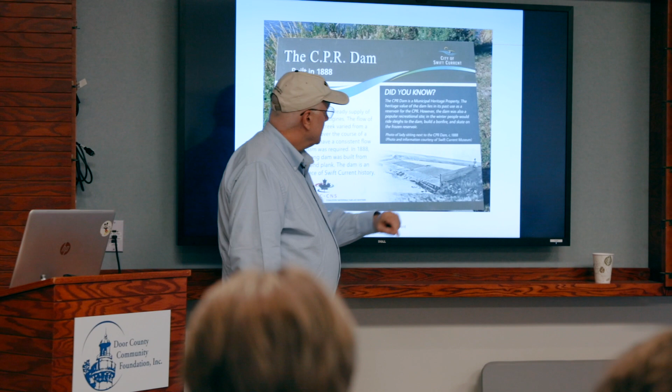I'd use this, but it doesn't work on this. But you can see her here. And this spillway was built in 1888. You ready for that one now? That's 1888. The Alaskan yellow cedar used here in the spillway is still there today.

The planks that are there today were installed in 1888. And it resonated with the city when I said, let's save them, because everybody else said, let's bulldoze them out. And so my idea is to fix them.

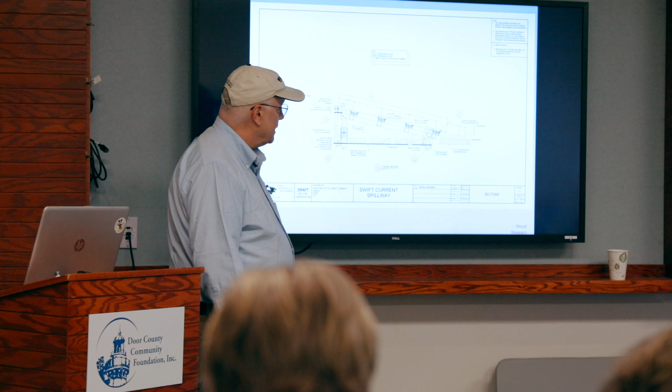And here they are here. You're going to use that same approach, and they're covered in water all the time. But the reason they didn't decay is because what? They're waterlogged, and there wasn't enough oxygen, so they didn't decay. That keeps them going. Look down in here where it would decay because there's enough oxygen, moisture, and temperature. We're just going to go in there and fix it. This is a design solution we have right here, restoring it with all in-kind materials and putting it back into service. The council is really excited about it because it's a heritage restoration, which resonates with the community.

This is an interesting one. You guys are boat builders around here. I don't know if you ever knew that in Canada we have this boat called the Blue Nose. If you've ever been across the border and got one of our dimes, it has a sailing ship on it, called the Blue Nose. This is the building it was built in, and we've got to restore it right now. We're in the middle of restoring it. It's amazing, don't you love it?

I mean, come on, really, look at these old arches. Look at them, it's amazing what they did back then. The funky part of it is depending on what boat went through last, even the tension collar ties in some of them are missing. Like, how is that building standing up? They're gone. So it's an exciting thing for me to look at restoring this building and bringing it back to service.

This is a head wall for a gold mine built by Herbert Hoover back at the turn of the century in Western Australia. He went over there and took an assignment and built this head wall in a gold mine with Douglas fir out of Oregon. And they want to restore that piece by piece. See, there are great stories of restoration out there today.

This is a cotton mill at Old Miss, 20,000 square feet of floor. We actually were able to help them understand where the timbers had come from, not only what kind they were, but where they were cut down, so that they could create a kiosk with a life tree so they knew where the timbers had actually come from.

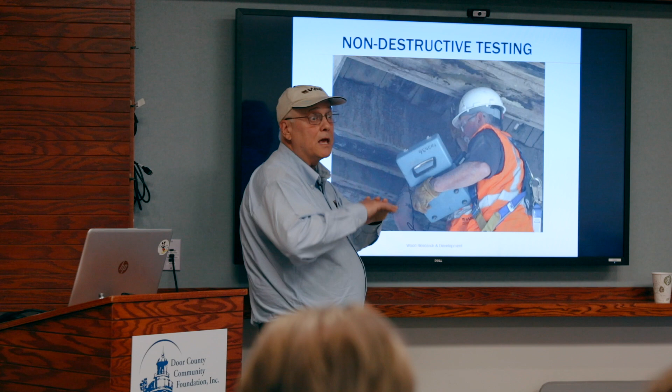But anyway, that's what we do, we developed it back then, and it helps us determine lousy wood. So what Joe's doing here, this guy was one of the technicians that inspected your tower. He's in Montezuma, Georgia, underneath an active railway line, using this stress wave timer to measure the spike damage down through the girder so he knows how to fix them instead of taking them out, because they have a train every 48 minutes. They're not going to take those out, can't get them out in time. So they want to know how to fix them in situ and keep the trains going. That's why these technologies are so important today for us in our economy, to keep things going.

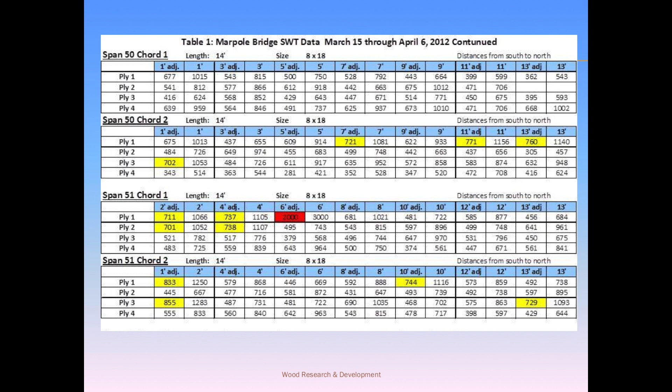The yellow ones and red ones are bad points in the piece. So why would I go in here and ditch them all because I drilled a hole in one place with a Makita power drill and found a little decay and said, geez, it's all got to go? Right? It was just that bad in that spot. So that's the story, we find all these guys here.

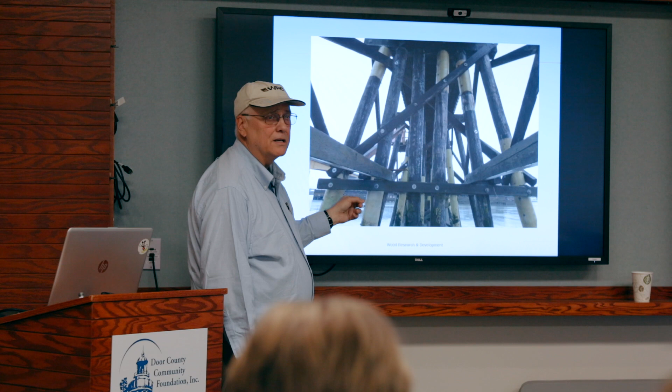But anyway, you see it, the reds and the yellows, and we fix it where it's bad, and here it is, fixing it where it's bad. Cost of restoration, $12,000. Cost to replace it, $135,000, in 4 weeks. You just don't do it that way anymore.

So the renovation of timber structures is being based on environmental benefits, for example, longevity, load rating considerations, heritage considerations, carbon trading, and cost benefits of using advanced methods.

The environmental methods are even going further because they have smaller worksite footprints. If I'm out at the tower and I'm going to restore it with advanced techniques, I don't want to cut a tree down anywhere around it. If my plan is to take it down, I've got to find somebody really brave to cut each leg and watch it fall, and I'm going to break trees down getting it out. If I'm not going to do that and I'm going to disassemble it in an orderly way, guess what happens to the cost? High. So smaller worksite footprints are pretty important.

Less immediate impact on vegetation, don't break all the trees down and leave a bald spot. Simpler site management, easier to look after. No erosion from works, no leaching. When it rains, you haven't brushed up the mineral soil, so it all washes out.

So these are the reasons we see this issue all the time in bridges. No cement dust and silica. Silica is the number 6 toxic chemical now in the world, it just moved up to silica. If you cut concrete with a saw, you have to have a urine test once a week now, it's number 6, silica fouling. In many countries, you can't build a concrete bridge over a reservoir finger, for example, if you have a reservoir for drinking water, you can't build a concrete bridge over it. So there's lots of impacts to these types of things that mean timber is coming back.

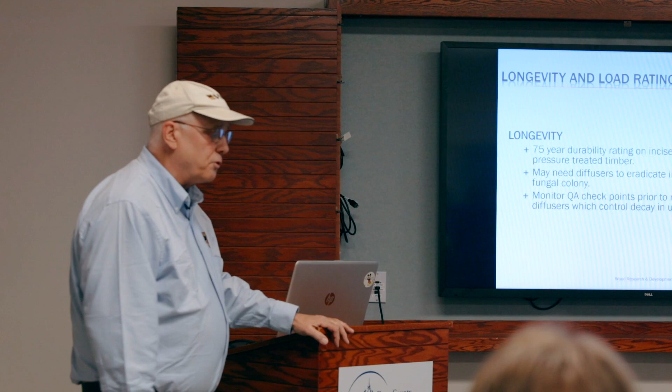So you see, really, it's about not knowing, isn't it? When you don't know, you don't know, that's the simple of that. So we have this diffuse opportunity to extend life. We have monitor QA checkpoints to check them regularly at the ground, what we call hot zones, and that allows us to extend life.

And this is the big one for me: 22 times less energy to build a timber structure than a steel structure - 22 times less energy, 16 times less than reinforced concrete. And timber is so great because what? The trees are renewable and they pull CO2 out of the air. It's our roots, see? Timber's in our roots.

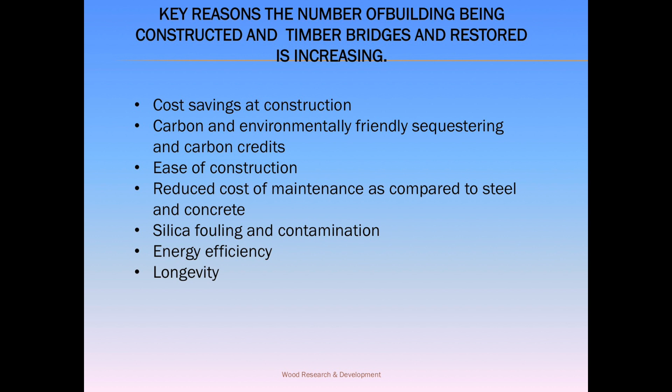Simple, that's the way we roll. A fifth the cost typically to retrofit - a fifth the cost, I'm not telling you what this costs yet, it's going to be at the end, you got to stay, you'll be really sick of me by the end of it. So we got a summary: cost savings at construction, carbon and environmentally friendly, ease of construction to fix it, reduced cost of maintenance downstream. These are the reasons today that we're seeing buildings and bridges restored and built with timber.

What is this material called timber anyway? Let's talk a little bit about that. Historically, why did we use timber? Well, it was readily available. If we came up to a gap across the river, we cut the trees down and built a bridge out of it. If we were settling an area, we cut the trees down, put them through a portable mill, roughed them up, and made a house.

My home that I grew up in has been in the Tingley family for 5 generations. It was built in 1820. My dad passed in '96 and he used it as a money pit for all my royalties from my patents. If everybody's fixed up an old house, they know what I just said. That house was beautiful - I skinned off the birch bark on the outside, squared timbers at odd spacings, lath and plaster. It was a great home, and I grew up in it. I thought it was great, and I wanted to fix it. It cost me to do it, but I fixed it.

So timber was the material of use, and it was fit for the equipment - we put up bridges across the country for our iron horses. This is the northwest part of our country, where Oregon pine, better known as Doug fir, grew. One tree, one train. If you couldn't make money in the northwest cutting timbers the width of this room, growing every 20 feet, 300 feet in the air, you were in trouble.

Take a look at these old pictures, because the species used in each part of the world were usually the species that were local, so in different countries, different species became used. Look at this one - can you imagine having a buck saw welded together in the middle and being tasked with cutting that tree down? You'd have to have a break and a few lunches before you got through it. Great old pictures of the origins of our country and the materials that went into many a building in this area.

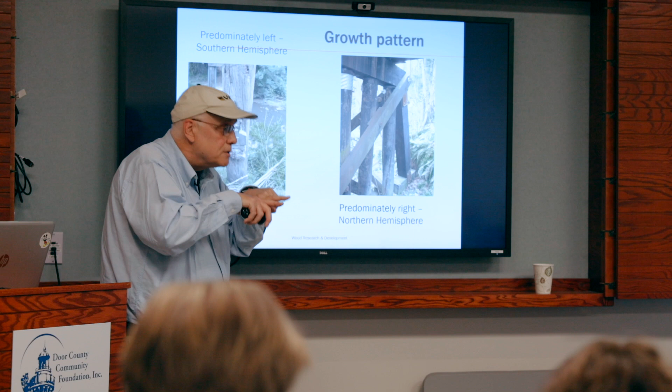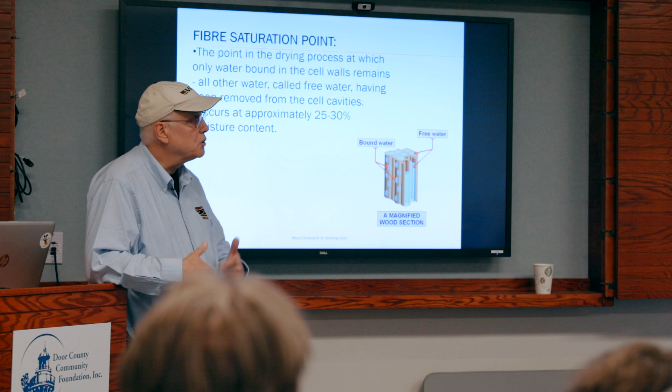So understanding this is important. Wood sucks up water. Who's ever heard of spontaneous combustion? Straw is a cellulose fiber. You put it in the barn, in the old days wet, what happened? Boom. Why? Because the cellulose, when it takes up water, gives off heat. When it loses water, it needs heat put into it to dry and evaporate the water. So when it's partially dry and takes up water, it gives off heat.

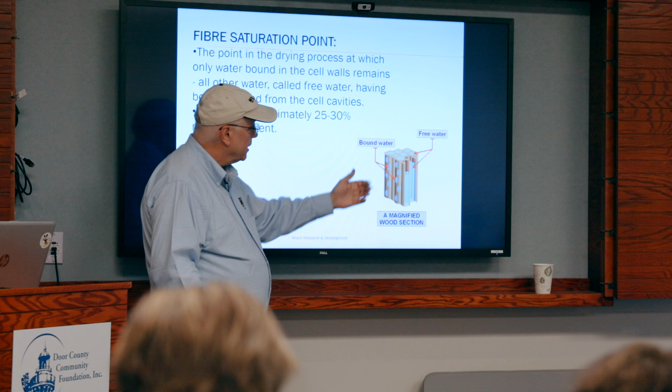And a wood piece that's in that tower is the same. It has bound water, that's water in the cell walls, and water in the center. Why am I talking about this? Sounds like senseless trivia, that's what my wife says about me, she says I'm senseless trivia. Well, why I'm talking about it is because the average moisture content in a bridge or an outdoor structure in this country is 13 to 14%, or 16%. Wood does not decay until it hits 22%.

Why is decay 82% of all timber structure degradation? It's the connectors, it's where it's connected. And one of the great things about the tower is all of the guy wires that are there are fastened to the piles with hoops that go around the column. When I looked at that in the picture, I said right away, gee, what a blessing that is, because oftentimes they go straight through the column and the water goes in that and gets in the middle. These have hoops. Another reason the tower is still in great condition today.

You see, there's a reason for everything. And if you understand those reasons, you'll be better at your job. So this is what goes on with fiber saturation point. You can see how wood shrinks and expands, shrinking more tangentially this way than it does radially.

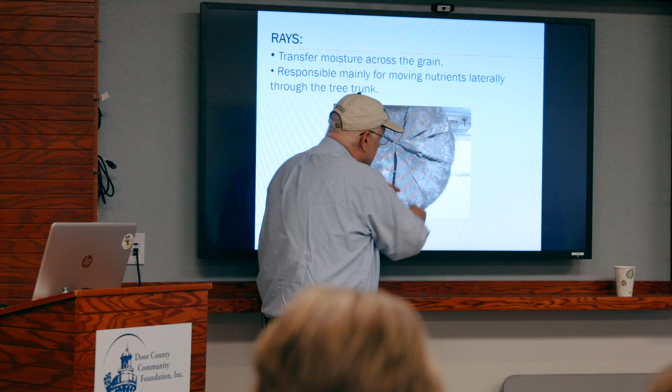When wood dries, moisture travel at the end grain is 100 times faster than on the side, and so it makes these patterns. Anybody that's looked at the end of a piece of timber sees that, and now you know why it happens, because this shrinkage is twice that shrinkage. That's why it looks like that, and that's what a tree looks like. If you call that a shear crack or a structural failure, you're simply wrong. It's already accounted for in the standards. It's not a structural crack, it's just nature responding to change in moisture.

There's a maple tree outside my home where I grew up, and my dad's dad swung on a swing on a big branch of that maple tree. It's still there, and my daughter Beth swung on that swing. Now, how could it be that dad's dad swung on a swing, and that tree's now 100 years older, and my daughter can swing on the same swing? You see, a tree is not a grass, it's a tree. Palm trees are not trees, they're a grass. Trees grow volumetrically, radially, they grow in diameter, they grow with their branches volumetrically. So thus I can put a swing on a branch and it be at the same height 100 years later.

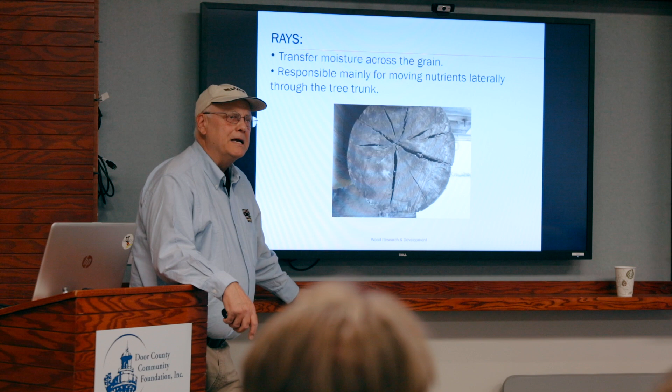So understanding that, well, what's the senseless trivia about that? The senseless trivia is that when I have 4 columns that are butt down on concrete and standing with their tip in the air, it's kind of nice to know that those columns will shrink and expand this way, not this way. So when I see reports that say they've shrunk, I say, well wait now, they don't shrink this way.

And so when I see reports that say it's got dry rot - how many people have heard that before? It's dry rot, have you ever heard that? No such thing as dry rot. It does not exist. Google it when you get home, everybody believes Google, right? Dry rot does not exist. Dry and rot is an oxymoron, you can't be dry and rot.

What they're saying when they say dry rot, it's frass, better known as S-H-I-T in a polite world. It's what's left over when decay's had its way. It's called frass, and they're calling it dry rot. No such thing as dry rot. So right out of the gate, when I see reports that say 'I got dry rot problems,' I'm saying well, they don't know wood. That's how I know.

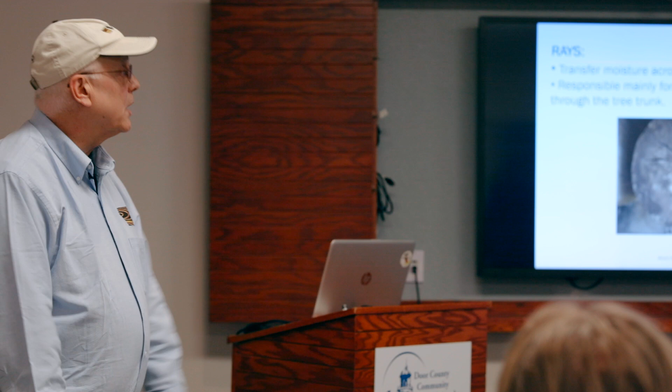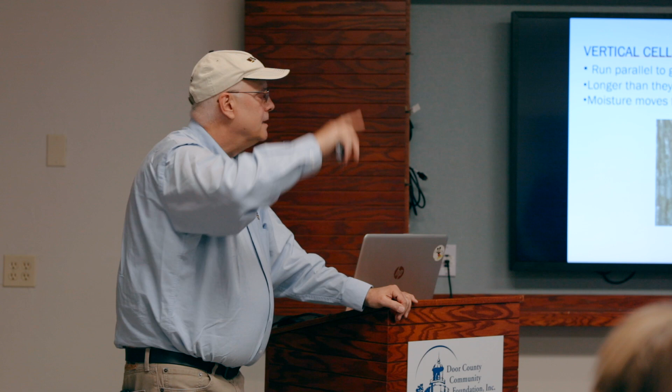And so capillary action is pretty important. People often say, well, what does that mean, Dan? Well, I say, you got the president's tree in California that's 450 feet high. That's 45 stories. Have you ever thought about how the nutrients and sap get from the roots to the tip of that tree, 450 feet tall? Contrary to public opinion, it's not elves. They're not pumping up the water. I know you've heard that story at bedtime, your dad's told you. No, it ain't true. The real story is capillary action. When the buds come out in the spring, it creates a draw, a dryness, and capillary action pulls the water all the way up that trunk 450 feet. Just because we cut it down, cut it in sections, and build the tower out of it, does not change it. It still has capillary action.

It still does it. Don't put it on the concrete. Concrete will saturate it. So it's hygroscopic. It breathes in and out moisture. It equilibrates with its surroundings, and it will equilibrate at a number that won't decay.

Why does it decay? It's called dew point decay. We put steel with it. Every day the temperature changes, the steel condensates, and it saturates the wood around it, and it decays. It's called dew point decay. And so we watch that all the time.

And wood has different densities. I work with wood in different parts of the world that when you bore into it, the chips fall out, and if they hit the water, they sink. They actually sink in the water. The wood's density is higher than water. If you drop a branch of the wood in its water, it sinks.

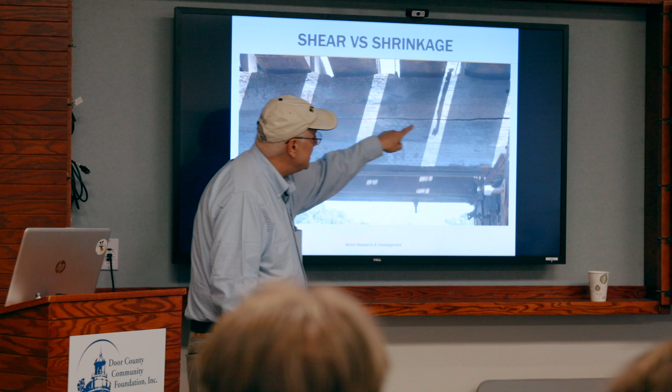How would they know any better if they're never taught? It's not their fault. So this is not a shear crack—it's a shrinkage crack because we have little bits of wood holding. You often see these cracks. That is a shear crack because there are no bits of wood holding. This one is a shear crack because the wood fiber is puffed up—the vertical spikes that killed it are fluffing out that wood fiber, which drifted up like that and runs down the side.

Is that a shear crack? No, it is not. That's just shrinkage because there's a boxed-in heart in there—a pith in the middle. It closes in here, and tangential shrinkage is more than radial. It responds at a ray line, and that's nature's fault line, so it pulls apart there with cumulative shrinkage.

That is a non-structural defect. They're in the column, but they're not structural defects. And you can see here, bango, look at it—this is a picture from the tower. Non-structural defects. Look. Look. You see this one? Non-structural defect.

So timber can be quite durable. It's important to have its durability. It can handle lots of short-term loads. It has no impact factor for bridges because it has great short-term impact factor capability.

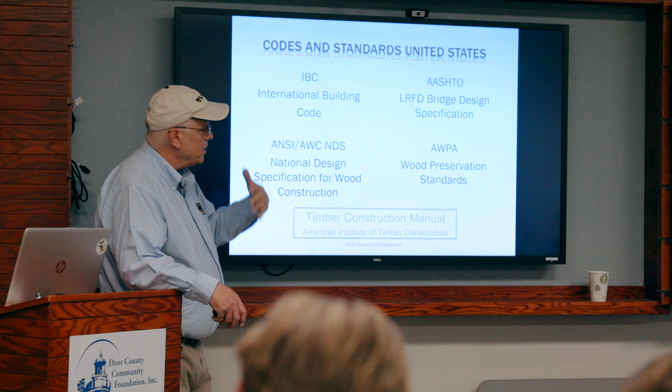In America, we have the International Building Code. We have AASHTO, which interprets this building code in terms of bridges. We have the National Design Specification for Wood Construction, NDS, and our wood preservation standards. These standards are what engineers use to design things like the tower.

The timber industry has a variety of grading agencies, because if an engineer designs something, a contractor's got to go buy the timber he designed—how would he know what the engineer wanted? The engineer puts a grade and a species on his design plans. These grading agencies are set up to train people to grade timber and put grade stamps on them, so that users can know what the engineers wanted, and they come together and understand it.

A lot of people don't know that a heavy dimension timber has an upside down. Does anybody in the room know that a heavy dimension timber has an upside down? They do. If I have an 8 by 12 or an 8 by 16—well, gee whiz, there's an upside down. The big knots go up in the compression top, and the small ones go on the bottom. So a contractor's got a 50% chance of getting it right.

Canadian National Railway built the bridge across Lake Pontchartrain, 19 kilometers, and they bought all new girders, millions of dollars. Within 3 years, half of them broke. They blame timber—I blame them. Not timber's fault. When you put them in upside down, that's not timber's fault.

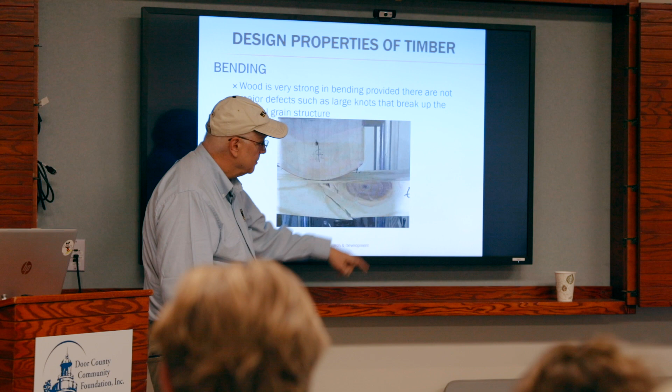So understanding how to build with timber is pretty important, because when you have a knot and instead of being on the top side it's at the bottom side, it fails prematurely and does things we don't like. Because the knot causes slope of grain—knots are denser than the rest of the wood, but it's the slope of grain around them that gives the trouble, like this—that's where they fail. So watching the knots, keeping them upstairs, is pretty important.

Now, what causes 82% of all degradation of wood? Fungal growth. Here's what it needs to occur: a temperature between 5 and 35, moisture over 22, oxygen over 21, and of course wood, the food source. If you have all of those, wood decays. So if you've got a deck with CCA treated green wood and loaded it up with deck screws from the top, water follows the deck screw down and gets at the bright wood in the middle that's not treated, and it decays. Thus, our treated decks last 10 or 15 years in this country and they're gone.

Worse than that, the deck plank itself might stay, but the joist underneath where you put the deck screw into is gone because it holds the water, doesn't have a chance to breathe, and away it goes. Can anybody relate to that? And so that's why it fails.

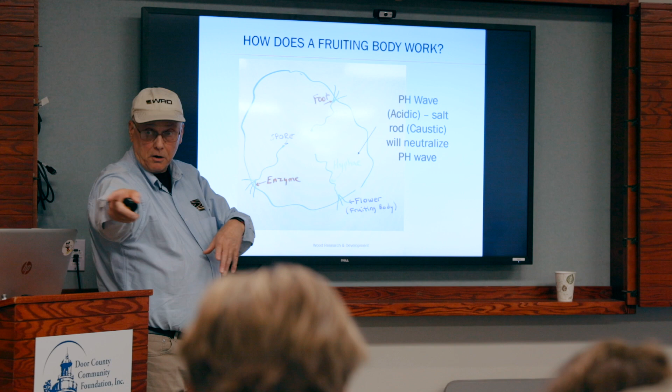So here's how fungal colonies grow. You have a spore, they're floating around in the air, you can't see them, they're on that piece of wood. You can go to Home Depot and buy a clean piece of wood. People say, I'm going to buy a clean piece of wood, it's got no spores. They're wrong, you can't see them. That timber, the minute it has the right ingredients - temperature, moisture, and oxygen - it's going to decay.

You can see it here. The spore grows a hyphae, grows a foot, secretes an enzyme. That enzyme is acidic. After it gets a little big and forms a colony, it puts a hyphae out and forms a flower - you'll see flowers on the side of decaying trees. So what do we do? We put a caustic, anhydrized, dewatered salt in here, and it neutralizes that pH wave and suspends the decay-causing fungi. Great idea, eh?

The best things in the world are the simplest. That's what my wife says about me.

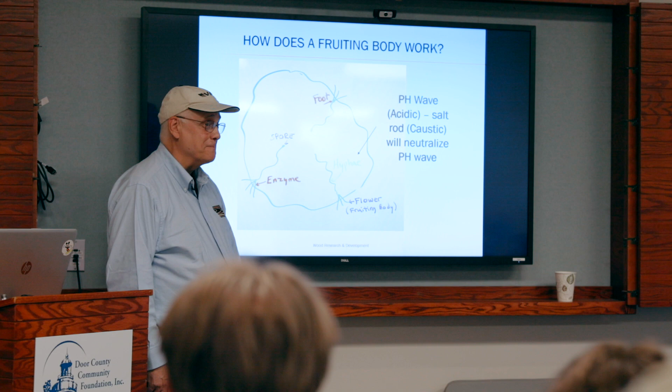So you can see here two types of rot, brown rot and white rot. Brown rot - what is that? That's the rot that basically eats the cellulose, leaves the lignin, the glue. The white rot - what's it do? Eats the lignin and leaves the cellulose. There's only two types of rot in the world, about 6,800 of each, 7,000.

And this stuff is nature's cleanup crew. People say, well, it's too bad. I say, well, it's not too bad because it's a good thing there are fungal colonies - if there were none, you couldn't walk through the wood because every tree that ever fell over would still be sitting there. That's the cycle of life. We just don't want the cycle of life in our towers. So we want to suspend it in our towers and not have it go the distance so it doesn't end up looking like this. That's what we don't want, isn't it?

So don't paint them - we shouldn't have painted the tower. Okay, so you see the leaning stairways here, and they think that's all about the stairways. Well, they didn't put any bases underneath these, and they sunk down into the water, and that's what caused all that. And they've got oak stair treads, white oak stair treads, which is really good.

We make barrels out of white oak. Why? Because it's got tyloses. I was on a cruise down the Danube with my wife not long ago, and we went into a winery and went downstairs in the cellar, and the guy's talking about all his wine barrels made out of oak. I put my hand up and said, what type of oak is it - red or white? And he said red. I said to my wife, she said, he's lying, let's go.

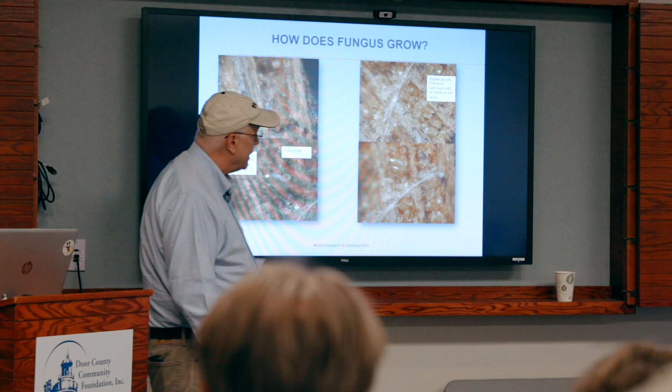That's tyloses. You see, when you get into the nuts of something, you can start to understand why it happens. That's what we're going to discover some day - the cure to cancer. Who's lost a loved one to cancer? Aren't we waiting for it? And it's going to be so easy because they're going to figure it out one day.

It's going to be like my block. It's going to fall glue side down, like toast when it falls on the floor. What's it do, butter side down or butter side up? Guarantee it's butter side down.

That's what happened to me, and it led to one of my biggest patent successes. That's what's going to happen with cancer, and that's what happens here with knowing what's going on.

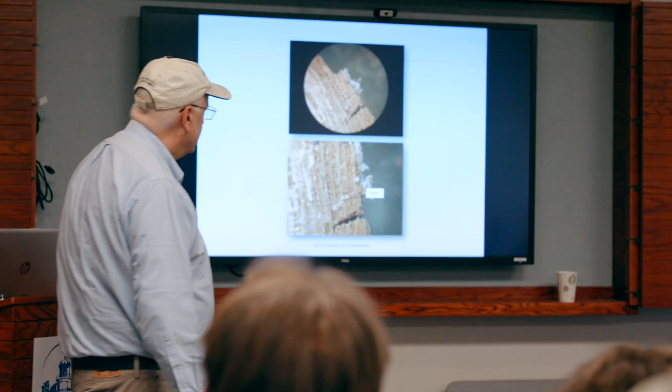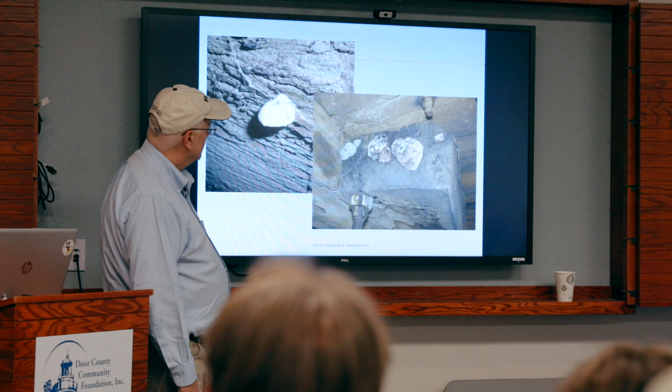What's that? A fruiting body. You see it on trees. That's a hyphae, it grows out. When the colony matures, it grows a fruiting body. You can see the hyphae right here under the microscope. This is oak, and you see a little flower out here. There's another one here, you see a little flower out here. Here's a colony, right here. Here's a fruiting body, another fruiting body, fruiting bodies, you see them all over.

Fruiting body out in the tree. You've seen those out there? Those are fungal fruiting bodies.

Here's what happens when you let a fungus go: 80% loss in compression perp. It got decay in the center behind the treatment because they vertically spiked it down through here. The water got in the middle, decayed out from the inside out. It lost compression perp to grain and blew out the cribbing. Cause and effect, cause and effect. There I am standing looking at it, because now they've got a 2-inch drop in the highway right here because of cause and effect. It's not wood's fault, guys.

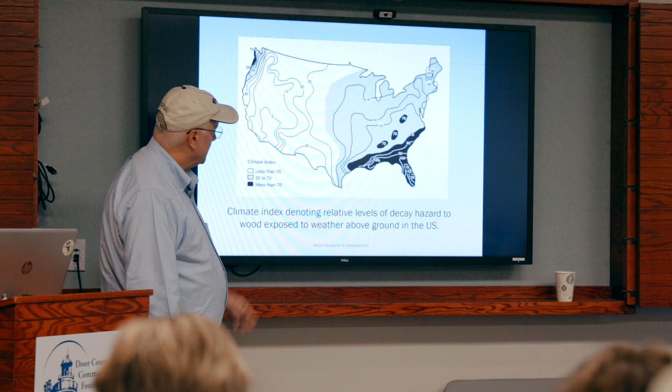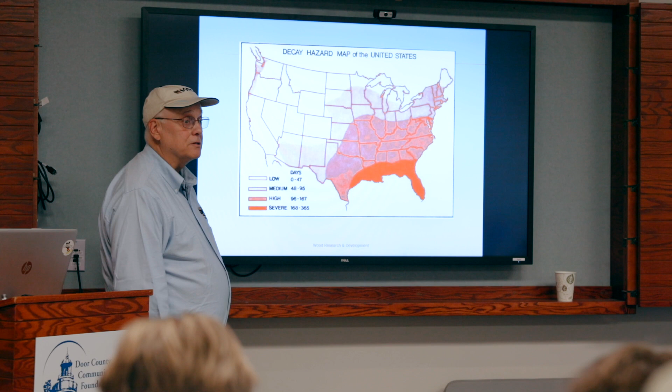So I'm on a skidoo, going across the northern part of Manitoba on the snow. I see a stick coming out of the ice. I stop, this guy stops, he sees the stick, he digs around it, the stick gets bigger. He marks it with GPS and goes back and they keep digging. They use X-ray, and in there, locked in the ice, is the HMS Investigator. They uncover it and all the skeletons are still in the bed, underneath blankets, everybody's dead. Every piece of wood in that boat is intact, the same as it was the day it got locked in the ice. We put the bridge in the fridge.

And so that's it, that temperature was missing. What happened here in the Black Sea? Oxygen was missing, it was waterlogged. What's this guy doing in the bayou? He's down with the alligators. Why? Because he knows that log's a lot of money. Southern yellow pine, it sunk down. There was no oxygen.

Or this guy here, I took my daughter to the King Tut exhibit, and this was in his tomb, and all these artifacts were timber. They were 3,000 years old, none of them were decayed. What was missing? Moisture.

Wood doesn't have a use-by date. It's knowing how to use it.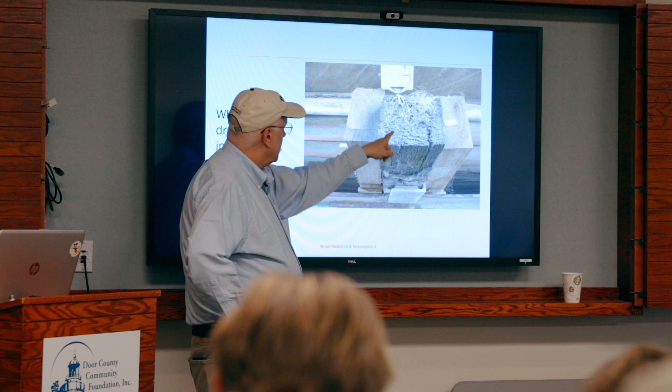If I'm going to put a drain on top of that crossbearer, it's going to decay right here, and then I'm going to send the crew around to fix it. Instead of putting a $2.49 extension, I'm going to say water and wood are great, I'm going to let the water keep going. Then I'm going to take 2 pieces of iron bark, cant wood, treated, and because I can't get them in next to this guy, I have them shallower, so I pack it up with a shim, bolt it to it, and then all of a sudden it shrinks because of seasoning. I have to go back, put another one in. Then by that time, the decay is coming over in this guy. Nary a time did they put an extension on it. See, it's not wood's fault.

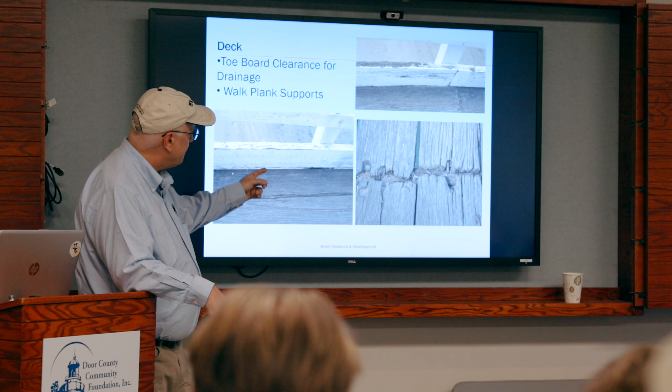It's not wood's fault. They had to keep it off the galvanized pipe, but they let it go on the wood. You know, put a little gap in here so the water gets off. When you put no gap, what happens to your kickboard? It decays. Don't paint it, stain it, and put a little angle. Don't put vertical fasteners in here, it'll save it. Don't paint it.

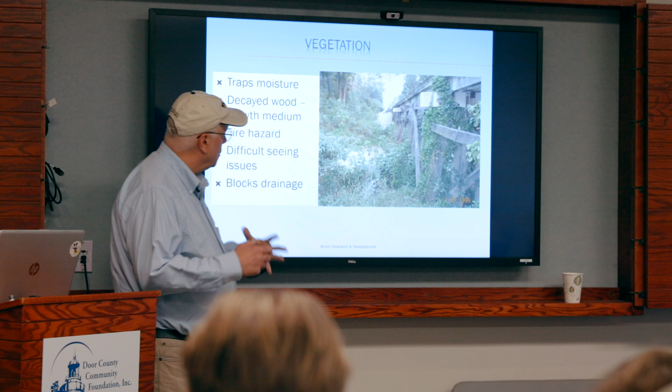This is 4 years old. Wonder why it goes away? Don't paint it, don't paint it. Don't let the vegetation get around it and hold moisture and allow that moisture to create decay. And don't put vertical fasteners in it. When you put vertical fasteners in things, it lets water into the middle.

1892, what part of that fastener is still good? The horizontal part, the vertical is gone. Look at the old square head cast nuts.

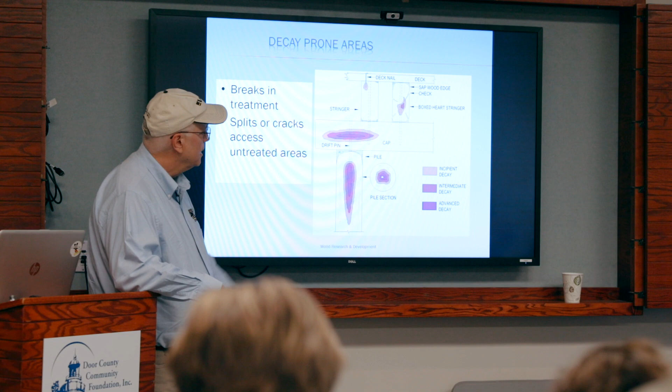So look at that - the vertical fastening is killing it, there's his hand stuck in it. This is a map you can get right off Google, yet engineers don't use it. They still build from the top, when you could get that right off Google showing you decay-prone areas. With horizontal fastening, every one of those bolts, that assembly goes 3 times further.

Look at this one - drift pins into the middle behind treatment, it's gone. Drift pins into the treatment, bright wood behind treatment, it's gone. Look at these, ruined every one of them at 20 years. They put mastic around it, still didn't stop it. The water went down and ruined it. And they put a brand new bridge together, oh, still vertical fastening.

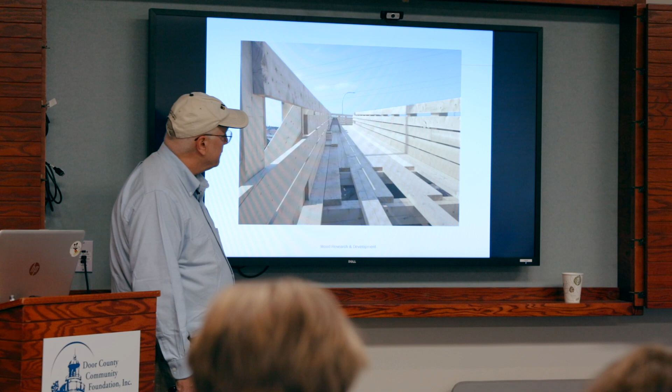Nothing fixes stupid, and you can see it - they still keep doing it, right? Now here goes this, we got great ideas, right? Because look what we're doing.

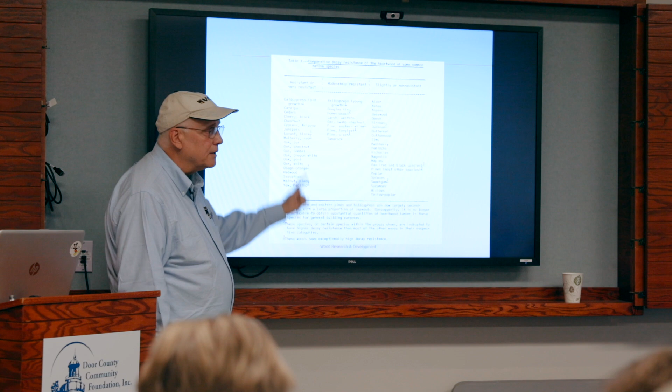They didn't just get those columns for free, they chose them. They got $500 to do it, and they chose the best. Why would we go take them out now?

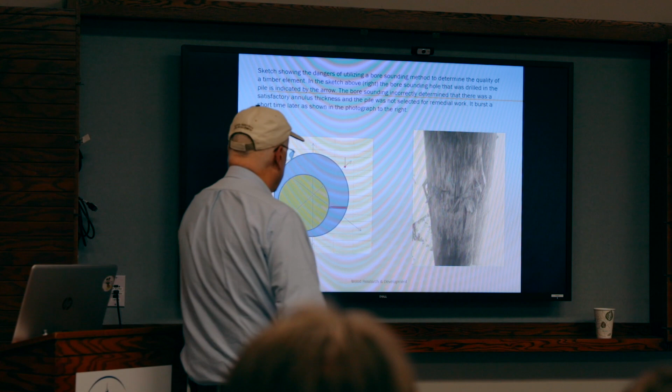Destructive testing - this is what happened when we drilled them. We get this result because we drilled it on one side, thought it was good enough, and the annulus thickness on the other side was this big, and this pile happened, and that happened. See, when you don't know, bad things happen.

So compression wave testing is important. It helps us understand the strength and stiffness of something by putting a compression wave through it.

We won't read these because I'm pushing. You can see here the blue box just like that one - you can get them for $6,800. Calibrating them is another $17,000. They're about $25,000 a piece.

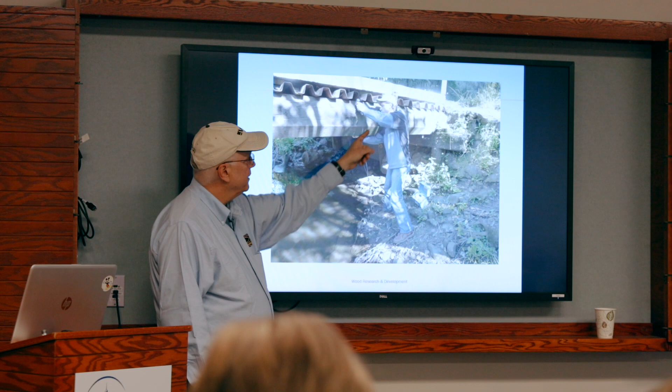And Stephen's using that because he's looking around that vertical fastener and figuring out where the decay is. And this guy here, when they hit it with a stress wave hammer, it fell out.

And we have a chart that we use that helps us calibrate them, and there's a lot of science to it - we won't get into it tonight. And then we core to cross-reference the numbers, and then we can do things like this.

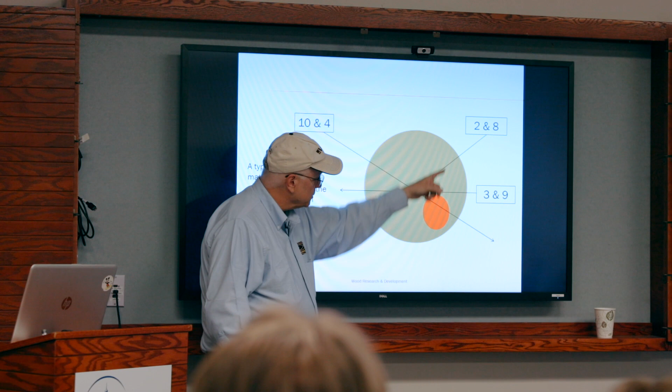Use a triangulation - it's called electronic pulse highlight and outline diagnostic, EPHOD. I kind of thought it was fitting because in the Old Testament it talks about David putting on the ephod and understanding which way the Lord wanted him to go. Well, you can see the same thing here as you look at this cross. It's finding the bad actors, as you can see here.

So here's John cross-referencing it with this and finding the reds and yellows, because we don't want this to happen. And if we use advanced technologies, here's what happens: 56 fewer false positives, 26% fewer false negatives, so that these things don't happen.

Find the bad actors before they find you, like this. It's too late once it's fallen out of the bridge. That's what Dave's doing there, seeing what the time is, 34:74.

Watch how you do it - don't get across the shrinkage crack. Do the right types of measurements like the boys did out at the tower. Find these bad actors, and away you go, getting the reds and yellows.

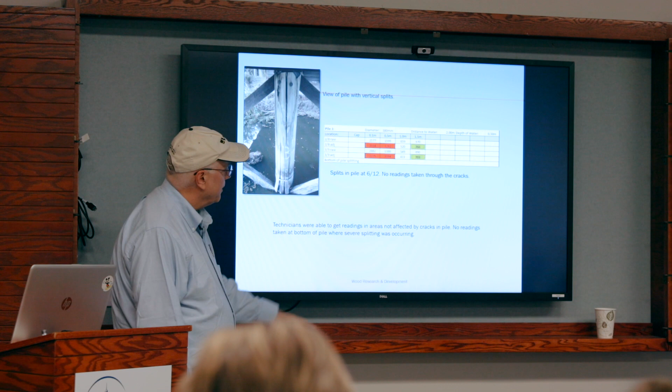Reds. This guy here, look - sapwood gone, and here's the little hole where the bore sounded it. We walnut shell blasted it after to find where the bad actors were. Look, that's decay, finds the soft tissues. It's not concentric. If you think you can find it by hitting it with a hammer, go for it.

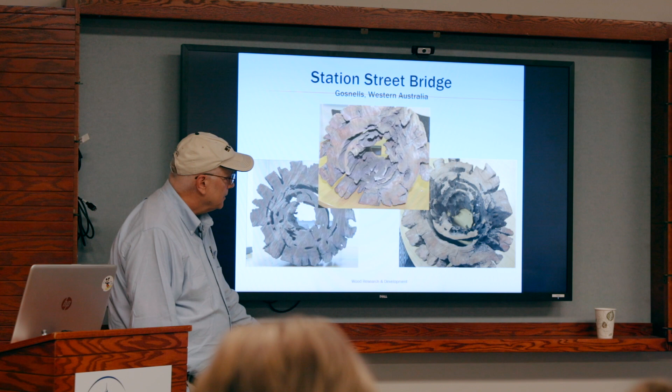You can see in here, look - you've got to use technology to find it. Look at that one, how would you find that? Oh wow, nature's not concentric - one arm's a little longer than the other. So it's just the way it is.

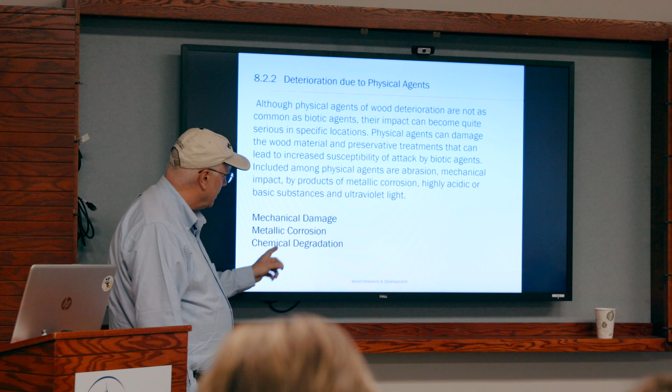So deterioration by physical agents here, mechanical damage. We can have degradation due to rust, metallic - that is what we call ferric degradation. We can have impact damage like this. We can have rusting pieces - they don't rust the wood, they just embrittle the lignin.

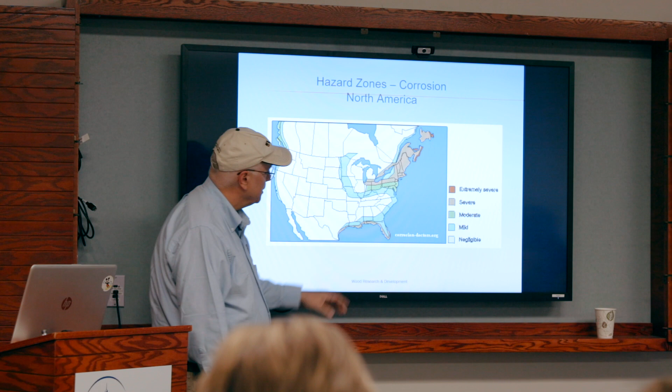It pulls away from the fastener, and you've got plenty of that in the tower. You can see it here, rusting, untreated steel, because we have embedded and exposed corrosion zones in the country, as you can see here. And we watch these as engineers, because our people want things to last a long time. This is one of the apostles in Australia. We want our bridges to go a long time.

This is in northern India. It's nearly 675 years old. They grew it, and they liked it so much they grew a double-decker. These are real stories, real pictures—not Photoshop. They grew their handrails, they grew their connectors. So if we build our connectors right, they'll help our bridges go the distance.

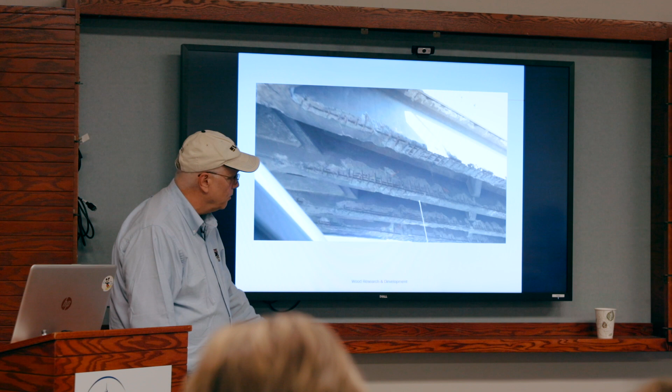People say, well, concrete lasts longer. And I say, well, you're wrong. We can see these problems everywhere with concrete. In Toronto right now, it's the largest infrastructure disaster in North America—$1.8 billion fixing concrete bridges with an average age of 32 years.

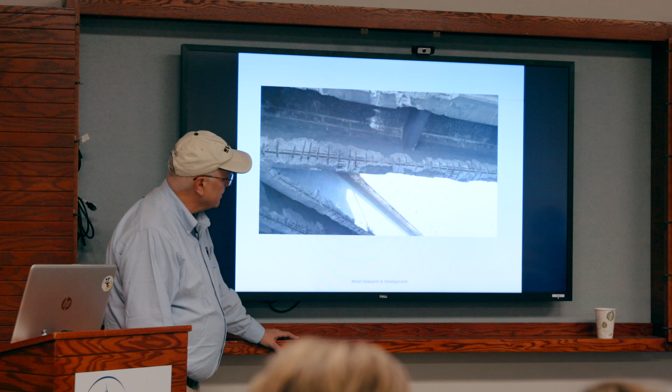So I heard this story about building a steel and concrete tower to replace the old tower, and I thought to myself, well, they don't know about steel or concrete—they wouldn't be saying that. That's rust-resistant steel, it's 28 years old. I guess it didn't go either.

So all materials have their Achilles heel, but here's wood still in service looking like this. Wood's very forgiving—it does a great job of going the distance. How old is this bridge? It's in Japan, 576 years old. It's called the Leaf Spring Bridge.

Why would we think that our structures can't last? If they're properly inspected and maintained, they don't have a use-by date. They go the distance.

I just came from Mount Rushmore yesterday. They had me go look at these two iconic bridges right as you go into Mount Rushmore—South Dakota owns both of them. They're iconic, they're 56 years old. The engineers told them these bridges had a use-by date of 40 years and recommended they spend $23 million to replace them. They had me come in to look, and I could only find 3 bad actors in both bridges. The cost of restoration was $300,000.

I was prepared to recertify them for another 100 years, and they laughed at me. They said, 100 years? They're already 56 years old. I said, well, that's great, because it's easy for me to offer a 100-year guarantee—I'm 65. Nobody laughed.

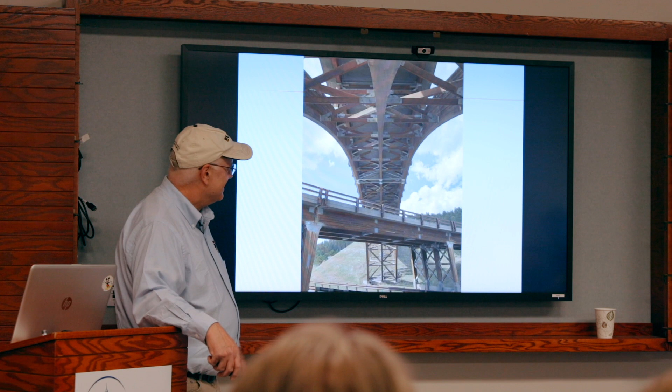You can see underneath, beautiful timber bridges. Like George Burns used to say, I don't even buy green bananas—I don't know how long I'm going to go. You can see here, look—reds and yellows.

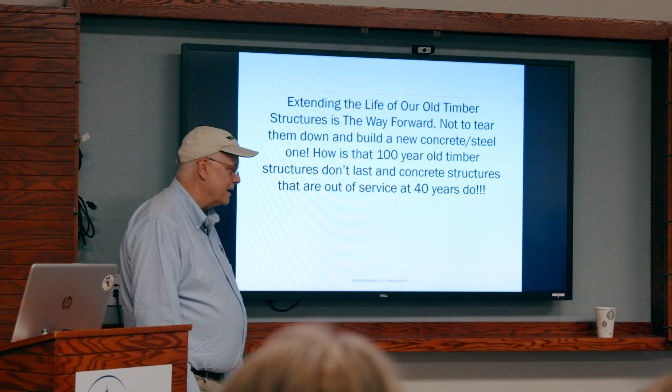So extending our old timber structures is the way forward. How can it be that people say timber doesn't last when we've got structures around 100 years old, and nothing in steel and concrete that old? We've got this going on in concrete. How is it that timber doesn't last?

I'm going to show these again because it's good to see twice. Timber tower restoration—this is the Jimna Fire Tower I talked about earlier. It's a favorite of mine because you get worn out walking to the top. It's 48 to 49 meters, about 174 feet, clear span, clear height, no guy wires, 3 columns, gray iron bark, spliced together in spots, built by hand a long time ago with a fire tower at the top.

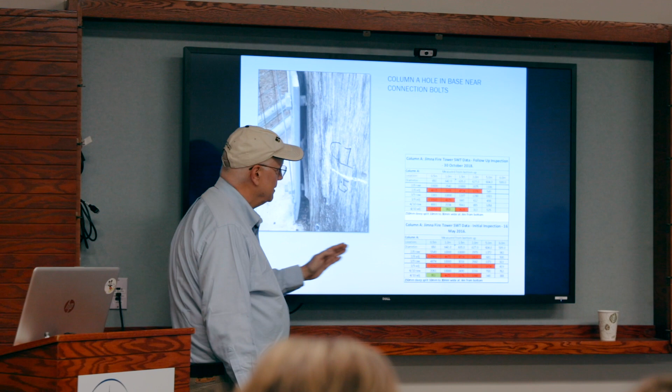They sought me out because they knew I liked to do stuff like this, and I said I'll take it in a heartbeat—let's go find the bad actors and fix that tower. You can see here the stairs, same sorts of things: bottom of the columns flaring out because they put them right on the concrete, bulging out against the stirrups. You can see the red zones at the bottom.

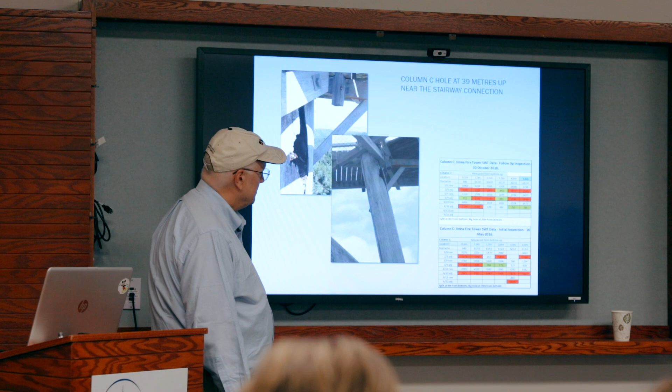Get up in here, you've got some places with fasteners where you get dew point decay. Bottom flare out—find those reds and yellows you can see in here. See the flare out? Even though they're butt down, they're still flaring out. You see this decay pocket underneath the landing—no wonder it's shut down. There's just a few areas like that. They've been drilling, trying to figure out what's going on.

Look how the tower's torquing—these are cross braces, this is looking sideways. This 3-column tower moves almost 2 feet side to side when the wind blows at the top. If you're up 175 feet on a clear span and it's moving 2 feet, you feel really uncertain. You can see the brace twisting out. These are the stair treads going to the top—you can see them worn here. They painted them.

You know, looks good. Paint hides a multitude of sins. In our business, we call it structural paint. You can see here, up the stairs it goes.

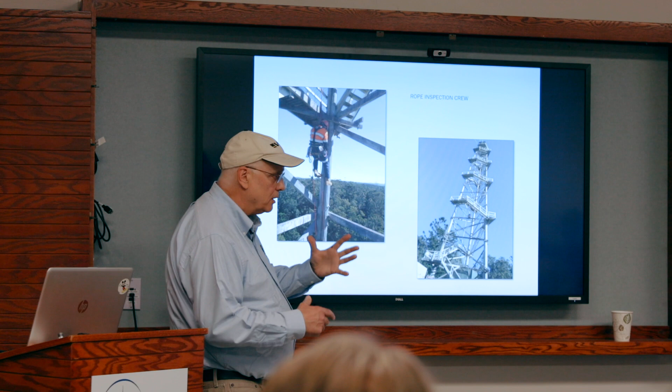Look at the top. So we rappelled down it to inspect it. We put our rope access guys on it and went all the way down it, inspecting it, basically finding out where the bad actors were and how we would restore it for this top.

And what was afoot there? They wanted to take this off with some huge crane deal or helicopter, cut it off at the top, put that down and make a display out of it and charge people $5 to see the old fire tower. And then they were going to lay it down on its side and take it away.

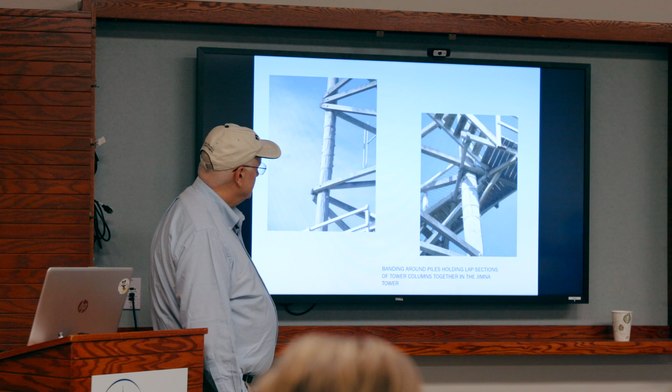So you can see here all the way up the top, these are interesting splices that it had in it. Here's where we restore it. You can see the guy's rope here as he's hanging down doing the testing. This shows you the stress wave times.

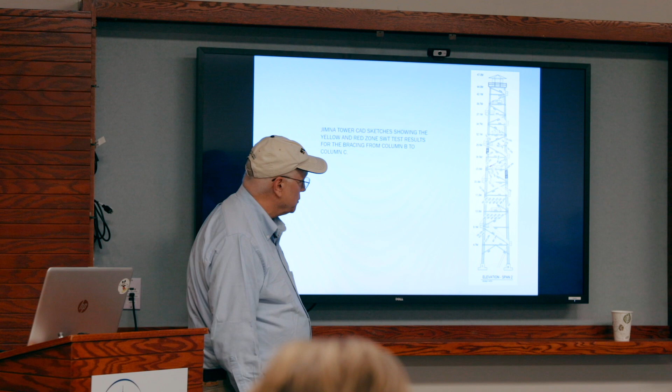Now we drew a picture. Look at this picture, there's the only places that were red. Find the bad actors, find the bad actors. Look, just a little yellow. Yellow means it cannot carry a known live weight, only it's dead. Red means it can't carry its own dead weight at a particular point. And these are the reds and yellows in it.

And this is the design. We developed this design. It goes out to tender next month to restore this tower right here. That's right now. And we're going to put some guy wires on this particular tower to make it cheaper to fix. This tower, what would I do with this tower?

Money was hard to come by in those days, and the tower represented a great way forward for the people in a community as it provided a way to look out over the beauty of the land beyond all obstacles. If you were going through the Great Depression, to be able to get up a tower and look a distance would have been a great blessing. Because your problems would have been crowding you pretty bad, wouldn't they? And so to be free to see and to dream, much the same way as the people of the day

gain strength. Engineers don't like to read this stuff. I know they don't, but I like to put it in there. I'm a sucker for timber.

So people gain strength to face the day, face the future, seeing how things would go beyond the days of the Great Depression. The community in the United States persevered through world wars, economic booms, busts, through all the country grew. During all this time, the tower also persevered.

Through that whole time, the tower persevered. No maintenance, poor maintenance, you name it, it persevered. It stood the test of time. When the steel and concrete towers they were talking about replacing it with, they were talking about lasting longer, were falling down and being taken down. This timber tower was going the distance.

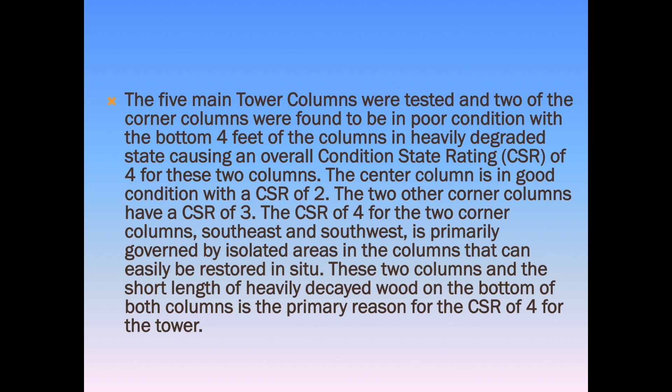It's a 3-tiered structure standing approximately 75 feet. The tower is closed to the public right now, as I found out today.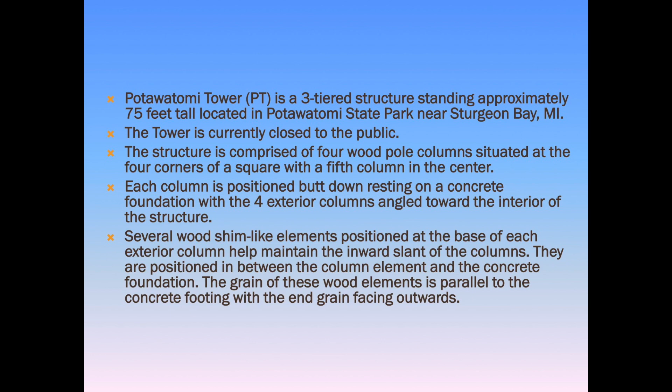The structure is comprised of 4 wood columns that were not randomly picked. They were not sawn, they were round. They were cedar. They knew what they were doing. It was chosen for a reason. They had collars that went around them, not through them, and they did it for a reason. They chose white oak treads for a reason. The tower didn't just happen by accident. It was there for a reason. That's why it's here today.

And underneath each of the column corners, there's shims to make it point inward. The one in the center is lifted up to let it breathe.

The stairs wrap around the central wood column to provide access to 3 observation levels, the first at 25, then 50, and then 75. The top observation level is open with handrails and used as a viewing platform.

The tower is located at the top of Government Bluff limestone quarry. It provides excellent views of the state park in the state of Wisconsin.

So we look at it here, you'll see photographs of stairs and handrails. You can see them by looking through here. Some of them painted. The outside corners on the stair rail are kind of settling. You can see some of these getting decay. You can see the verticals in here. These sorts of fix-ups in any tower are called minor maintenance.

It's called minor maintenance. As you can see in here, here's the collars instead of going through them with the guy wires. You can see that, painted it, wouldn't have done it.

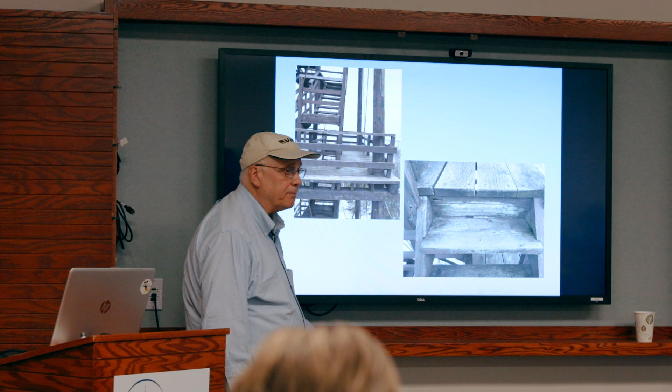If I had my way, I'd walnut shell blast it or acrylic bead blast it and then stain it with a stain less than 28% solids, Cetol 1 and then Cetol 23, and that wood would brighten up and you guys would have to put sunglasses on when you're around it.

It would be beautiful. As you can see here, you look at that and say, that guy's had it. There's some UV weathering there. It's kind of lost some section around the knots. It's got some shrinkage cracks around it. It kind of looks old. And the first thing you think of is toast. But when we do the internal non-destructive testing, it isn't toast.

And so you can see there are places that are toast, and you can see those. My little girl could pick that one out. I don't have to be a rocket scientist to figure that one. And so you can see here these places.

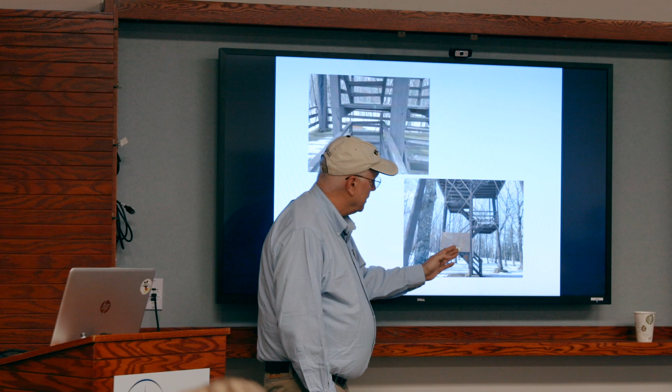But these decks and rails and systems can be easily restored. It's not a big bill. And we can take that plywood down, and you can see here the big 4 columns going. Look at that, guys.

Now you know why I went through the first of it, didn't you? But you're thinking, this guy sucks, he put me through all these damn slides. What's he up to? I want to go home and feed the cat. You're like, come on, what's wrong here? Jeez, you know? Look, this is it.

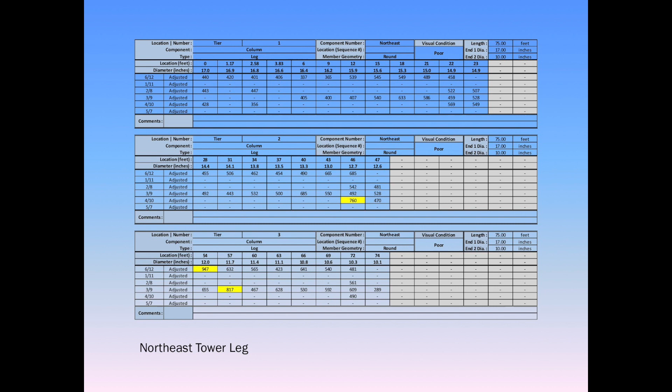Now you know. When you looked at the previous ones, all the reds and yellows, there's no reds and yellows here. That's what I'm saying.

But look at that, I mean, come on, man. Yeah, there's a bad guy right here, but he's isolated, you can get him. Look, there's some at the corner, here, but very few yellows. Yeah, you can fix, look.

They put tar on it. I don't know if some of you guys are responsible for that. I'd never do it. I'd get it out, let the wood breathe. Don't coat it, don't tar it, let it breathe.

So I say to my wife all the time about me, when I'm home on Saturday, I want to work out in the shop. I say, let me breathe. She'll come out with this big list for me, you know, I haven't seen you for a week, I want to do this, this, and that. I said, honey, come on, I got to be able to breathe here for a minute.

That's what this wood does, it needs to be able to breathe. Look, a few reds. These guys here, you're looking at them and seeing this and you're knowing why it's got, look.

Northeast tower. You know, that's it. Look at that one. The center tower leg has no decay in it, the one they singled out. Cut it out. None.

There's no decay in it. Why is it shut down? It's got a few weak links, right? It's that analogy I told you - you're hanging from the steel chain. Don't take the average, you got to take the least. But go fix that steel link and then hang from it.

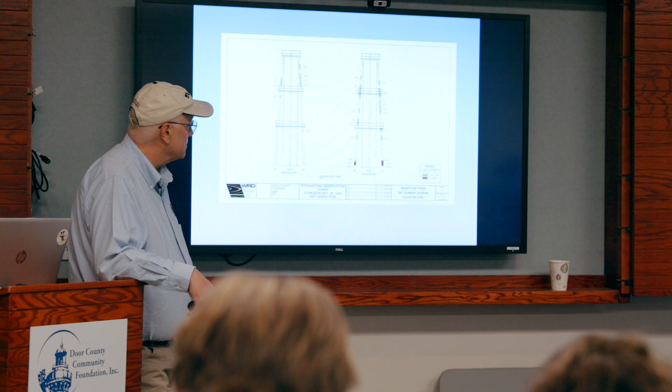See here, that's what it's done when you put it graphically and we drew it out. You can see right off where the bad ones are, right? Go fix them. So analysis of the cores revealed specific gravity.

That's the ratio of density of wood to density of water. It was Western red cedar, highly durable, as you can see here. In these southeast columns, they got some voids in there, which we found. And as you can see, this tower can go the distance to be able to be restored.

This is the cores the guys took from it. So we know what we're doing. We identified them under microscope and followed the proper keys to identify the species and its grade, and put together an in-kind repair strategy like this for the element.

This is an advanced fiber. We gave a couple of options. And here is the design, hot off the press today. I was over there working at the B&B, putting this into the PowerPoint an hour before tonight. So nothing like a just-in-time strategy.

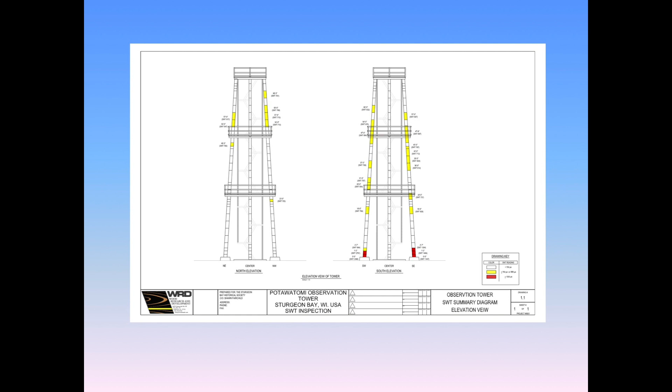You can see this is the specifications page. This is the replacement requirements page here. You can see this is the drawing showing the posting detail here. We'll take care of this guy here with a typical posting detail where the reds are.

How do we do that? We support the tower with guy wires. We then turn around and cut it, put in another one. There's a specific design characteristic - you see that space in there underneath it? And we'll post that piece.

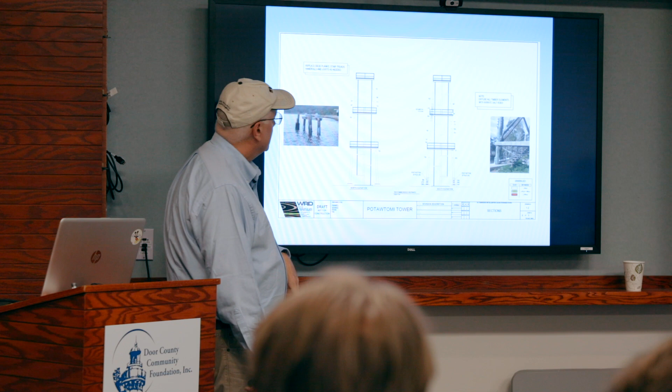You can see samples here, and this shows you how it's done. We hold that column up. Then we take a section out, put another section of Western red cedar in with a specific design detail here, and put it in action.

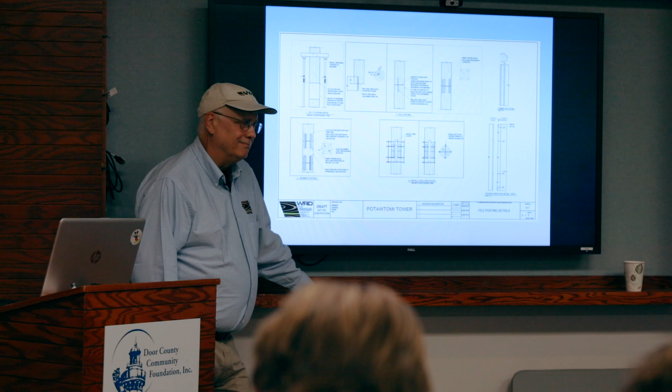Now, if you've never had any training in timber design, you probably won't know what to do here. But I've got the odd one done - 1,350 to be exact. So you can see here, this is the cost.

You're seeing it for the first time. Not even your buddy Sean has seen this. I can't see it. You can't see it. That's what my wife says all the time. Okay, look,

249,000, you see here. And this is what? Here, walnut shell blasting. If you want it structurally sound to be able to walk up that stairs, then you're talking 170. If you want to fix the columns to keep it from coming down, it's less than 100,000. Eagle was 750. When you know where the bad actors are, you can fix them at much lower cost.

Understanding the situation is part of curing the situation.

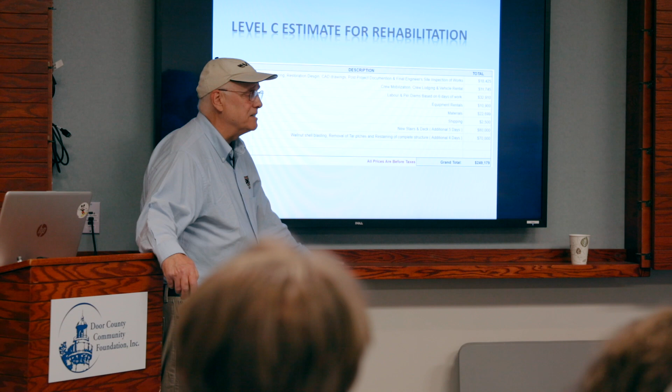So no fibers, none of that. I just chose one that I thought was holistic for you. I didn't put fibers on it. I figured on using kind for kind, sectioning and diffusing, natural. If you want to see fibers, they'll be a little cheaper. But I figure when you got it this low, you might as well have it done the right way.

So you can see this is one, same height. So I thought I'd show you one that I inspected, designed, and went and fixed. It's the same height. Does that sound good to you? Four-legged stool, still the same. Taking pieces out of it. Let's look at it here.

Finding the reds - look, what did they do with their guy wire or their bracing? It went through it and ruined it. You guys have collars around it, and you can see that guy's bad. Well, we're going to take that guy out. And you can see we put guy wires to hold it for safety, to keep the tower from coming down.

And they had engineers come in and say, let's put concrete around the bottom of it to restore it. And they floated concrete around the bottom. It ruins it - it's the kiss of death. They go away 66% faster.

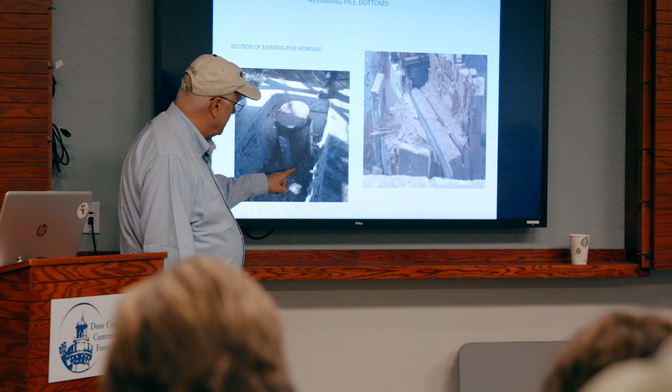So we had to jackhammer the concrete out and then get at the stirrups from the old base. And there's the old one in here with the old stirrups. We connected the new stirrups to the old one, cut out the old one. You can see it here now connected and the concrete cut away from it.

You can see these guys. Here's the new pile segment that was changed out for the bottom, put in place here. You can see it here, the concrete floated around, and the engineer of record for the council came around.

He said, 'Dan, too bad. Your pile was too short. I always tell you to measure twice and cut once.' And I'm saying, 'What? Measure twice and cut once? What are you talking about?' He said, 'Well, look, you got an inch too short.'

Is the inch too short? I planned it that way because I want the air underneath it so that the moisture doesn't come from the concrete and ruin it again. Like your center column in your tower? And so here it is.

You can see it fixed up. This is an internal shear pin, it's inside so you can't see it. This is the outside, that's a rotation spline glued into it. You can see there, and basically we put that back in service.

Do you remember what it looked like? Hold on. Whoop, right there, this is it. Okay, come.

So we still have the bolts going in there? Yeah, those nasty bolts. I know, they're still there, huh? Yeah, they're not rusted either. But anyway, you got that piece back. And there it is.

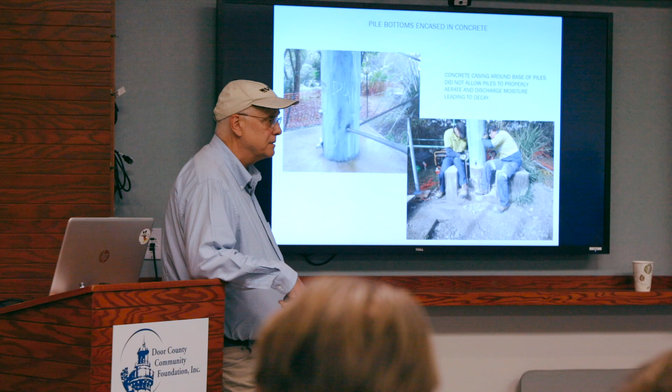So we put diffusers in to try and extend them, but down in here it's not going to work. And so you see here, we don't have the guy wires going through. They're horizontal, lagged in and sealed, and this is a hook here to carry the new guy wire cross brace, with new timbers inserted into it.

And these guys here, you see them all over. They put Malthoid on the top. Get rid of those guys and don't paint it. Get rid of the paint. So we got rid of those.

Let it put copper naphthenate, 2% reactive agent, heavy saturation 3 times, then anchor seal, which is paraffin wax and water, and get rid of that metal, because every day at temperature change, that metal sweats. And fix these guys where they're at in situ and put this thing back in service.

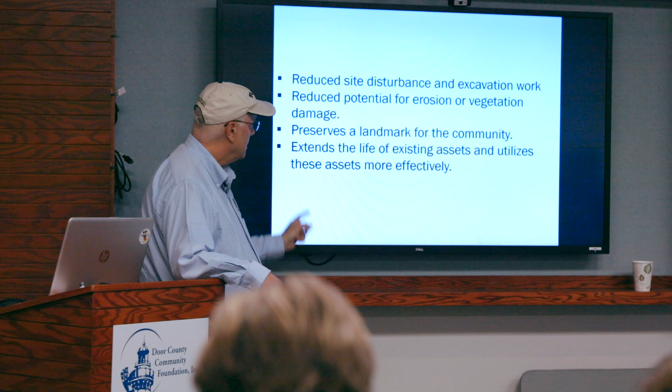The maintenance items listed above can be completed at significant cost savings. That's what I talk about here with the tower now, back to your tower. In addition to the cost savings, using advanced timber restoration techniques, repair of the structure has been followed to give benefit: reduce site disturbance, reduce potential for erosion, preserve the landmark for the community, extend the life of existing assets, and utilize these assets more effectively.

In summary, Potawatomi Tower has stood the test of time for nearly 90 years. It is weathered and contains conventional UV section loss as well as non-structural cracks and splits in some of the elements. The tower has 2 columns with advanced decay and cavities in the bottom 4 feet. However, well over 90% of the critical structural elements are capable of continuing on in service to the community, with the help of remedial treatments that can be implemented as the tower stands. It has served the community for decades and deserves the opportunity to continue to do so.

The cost of remedial work is a fraction of the cost of replacement. The cost of tearing it down and disposing of the tower will be the same magnitude as repairing the worst of the heavily degraded zones. The best option moving forward is to restore the tower and extend its life utilizing advanced strategies. Clearly, advanced non-destructive testing and assay sampling testing by an IAS-certified test laboratory has shown that the vast majority of the primary structural elements are in a condition suitable for continued service.

Proper maintenance will extend the life. The implementation of proper repairs will bring the structure back to proper occupancy capacity. With these actions, the Potawatomi Tower can go on to serve the community for another 90 years.